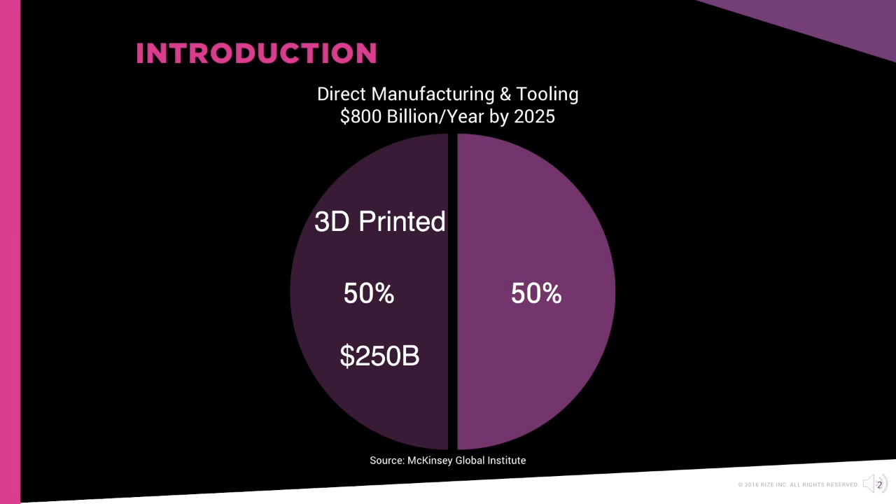McKinsey Global Institute reports that of the $12 trillion manufacturing industry, $800 billion per year by 2025 will be direct manufacturing and tooling. And of that, 50%, or $250 billion to $550 billion per year, will be 3D printed.

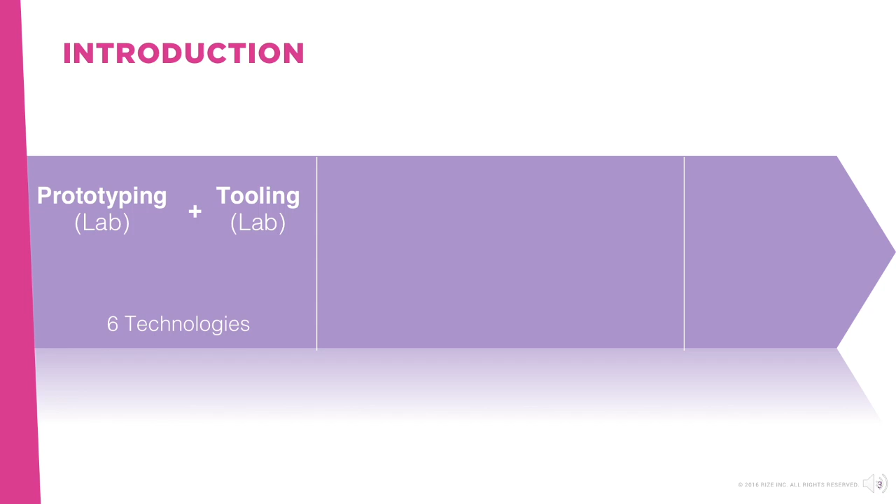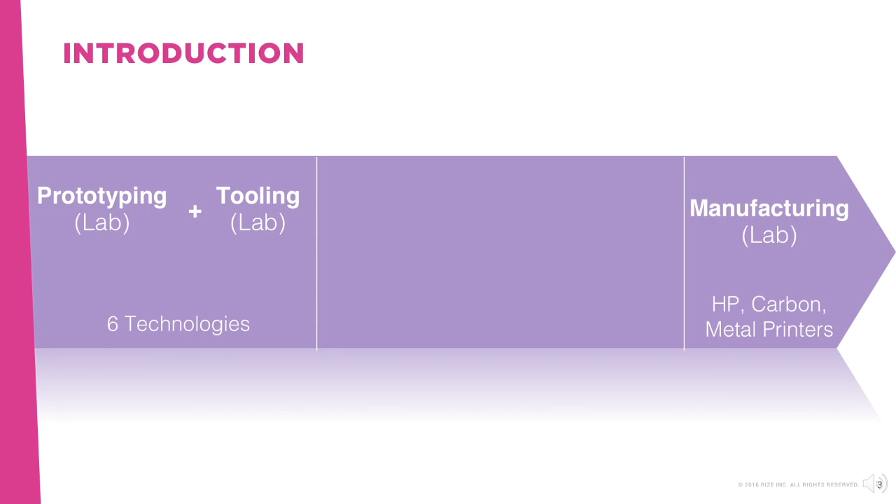Despite this colossal market opportunity, most of today's industrial-class 3D printers are suitable only for prototyping and tooling and must be situated in additive manufacturing labs due to their size, expense, special facility and equipment requirements, and complex pre- and post-processing methods. Currently, only a few systems—Carbon, HP, and some metal 3D printers—are capable of addressing the market for low to mid-volume manufacturing parts. And although these companies are undeniably legitimizing 3D printing for manufacturing, their systems come with significant limitations that restrict large-scale adoption of and applications for 3D printers in direct manufacturing.

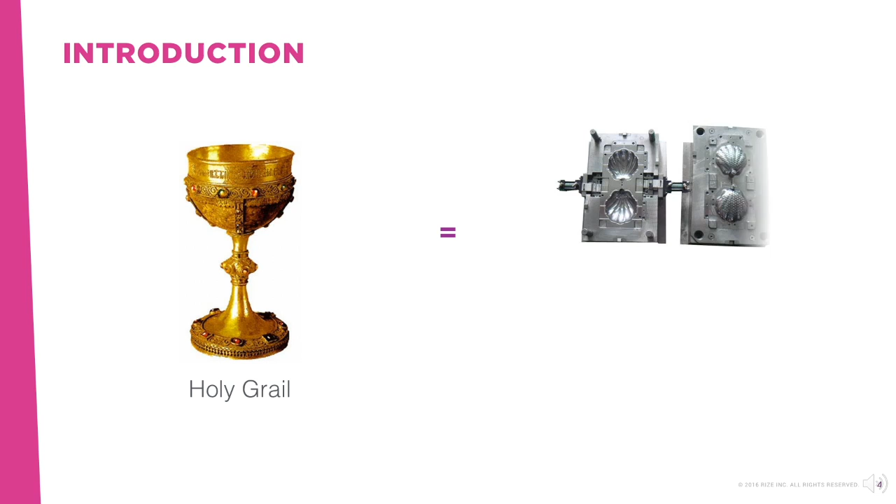In this webcast, we'll discuss how 3D printing has the potential to increase large-scale adoption of the technology for new direct manufacturing applications beyond the additive manufacturing lab, and explore what's needed to get there.

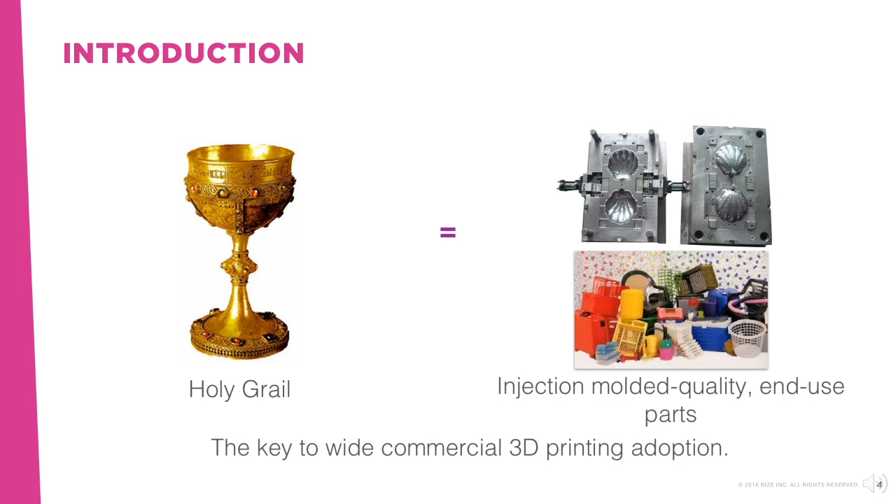The factory of the future: your office.

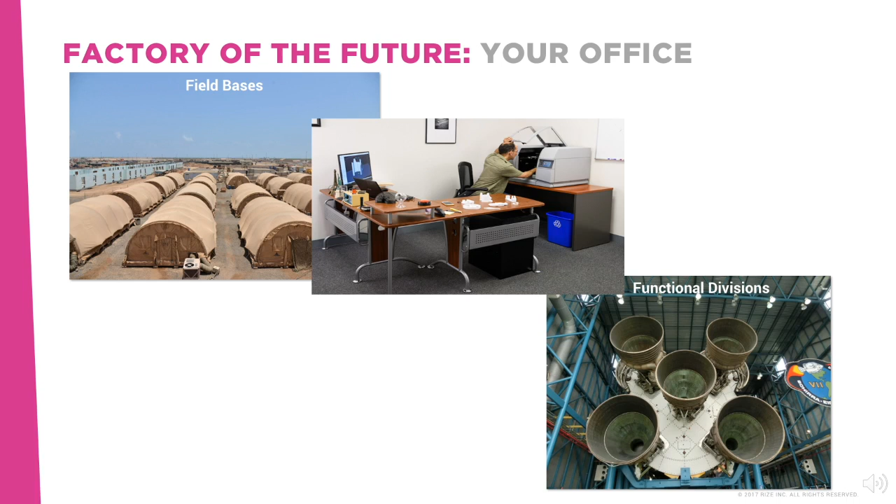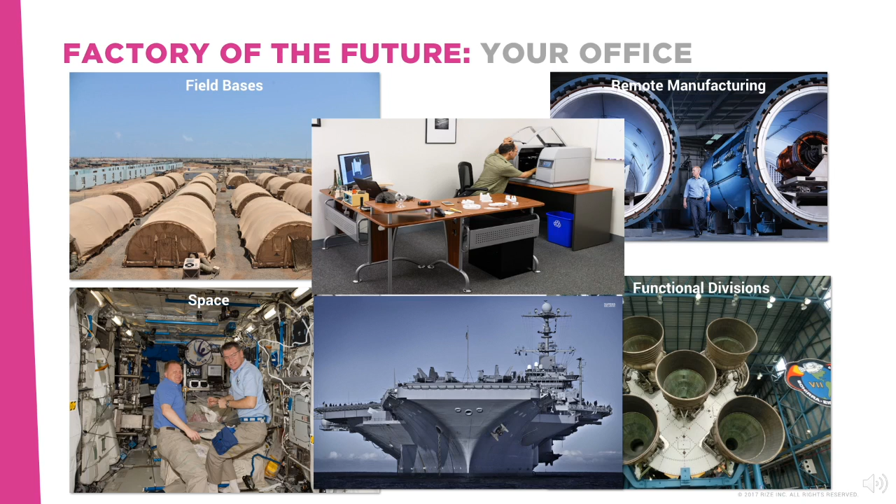In order to significantly expand manufacturing applications and markets for 3D printing, the technology must break the chains of the additive manufacturing lab and move into the production facility of the future, the manufacturing office, wherever that office is located and whatever form it takes.

There's an enormous unaddressed market for producing customized one-offs and low-volume manufactured end-use parts and tooling on demand in both lab and non-lab environments, including the mechanical engineer's office to make real functional parts, on the manufacturing floor next to the assembly line to make custom tools, jigs, and fixtures on the fly, in the factory to make spare part replacements on demand rather than in bulk years earlier and stored.

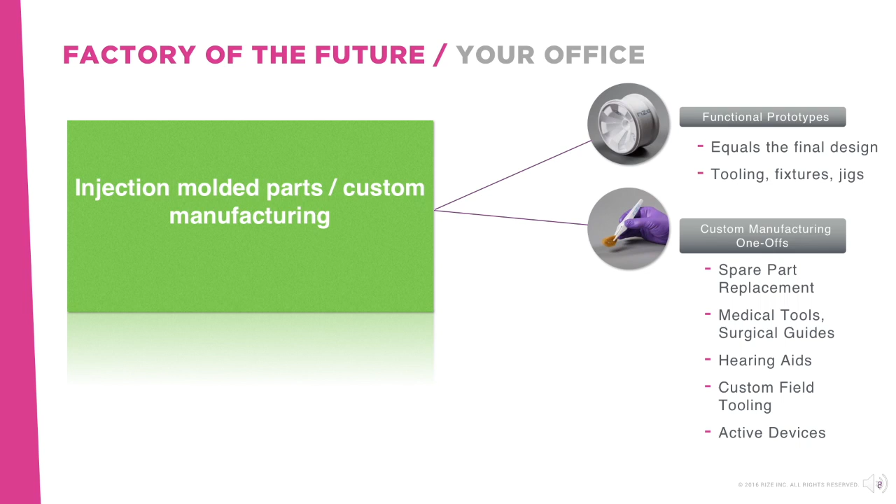In the dental, medical, and audiology office to produce dental devices, surgical guides, and hearing aids uniquely tailored for each patient, the mechanic shop to make replacement parts, on ships, in air, on spacecraft, and in military field locations for field repairs, and more.

The manufacturing office is a new paradigm in manufacturing because existing manufacturing-capable 3D printing systems are unable to address this market. It's simply inefficient and impractical for them to produce one-offs, given their size, price, and complexity, and they certainly aren't systems that can be located in an office or in other remote non-lab locations due to their materials, processes, and post-processing requirements.

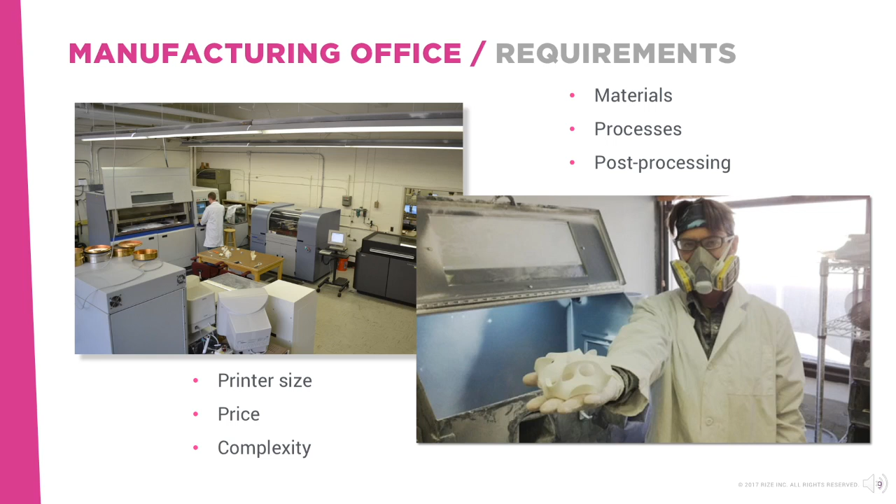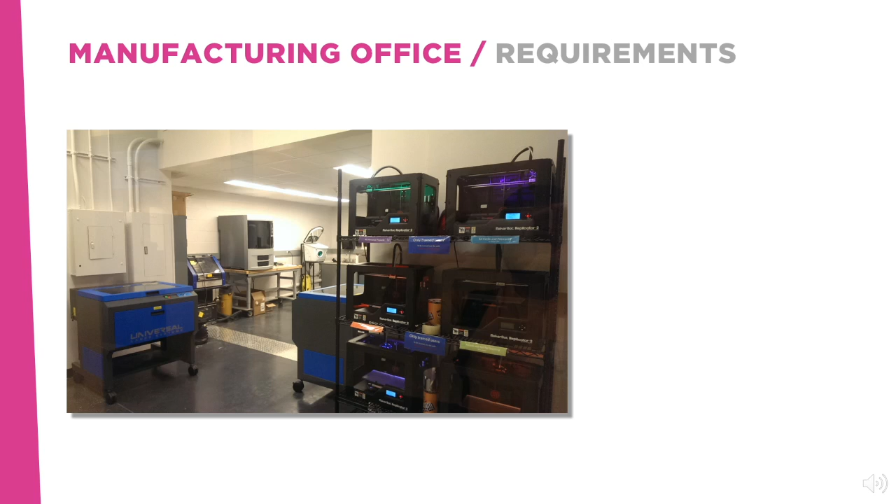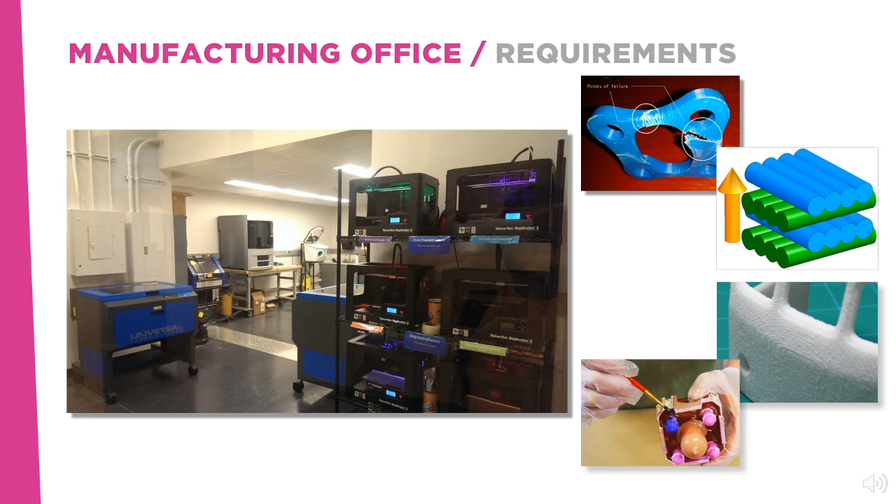Prototyping-capable 3D printers, representing the majority of industrial-class 3D printers today, can't produce parts with the required strength, surface finish, heat deflection temperature, color, and other properties that would be considered acceptable for manufactured end-use parts. Further, these systems involve steps throughout their processes that can't be done in an office and in remote locations outside of a specially equipped additive manufacturing lab.

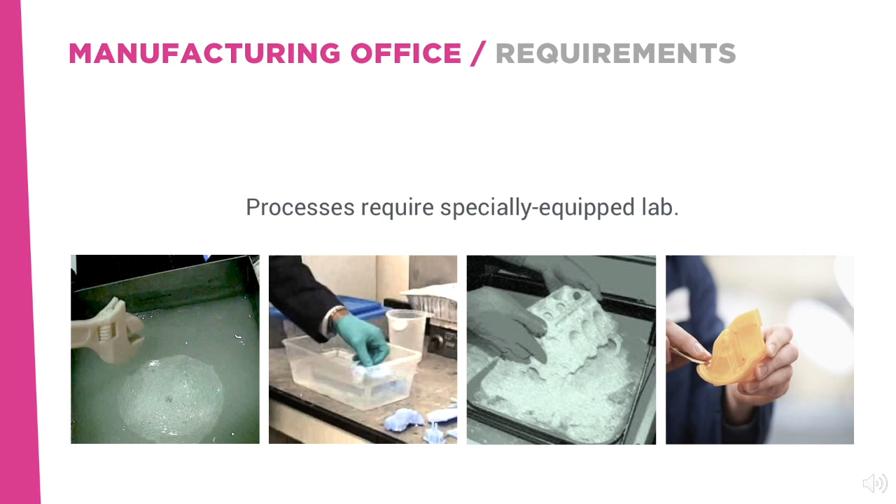With the deafening burst of the consumer and hobbyist 3D printing bubble over the last couple of years, some large companies that previously offered a low-cost line of desktop 3D printers targeting this audience wisely abandoned those lines in favor of expensive industrial-class manufacturing machines suitable for additive manufacturing lab environments.

Yet other companies have taken a different approach. These companies didn't change their machines. For them, the shift has purely been a marketing one, where they're selling their hobby-class desktop 3D printers, previously marketed as consumer 3D printers, as low-cost commercial-grade systems. Still, other companies have made some minor changes to their hobby-class machines or software and labeled them professional or commercial 3D printers, more for marketing and sales impact rather than meaningful enhancements that would benefit the typical industrial user.

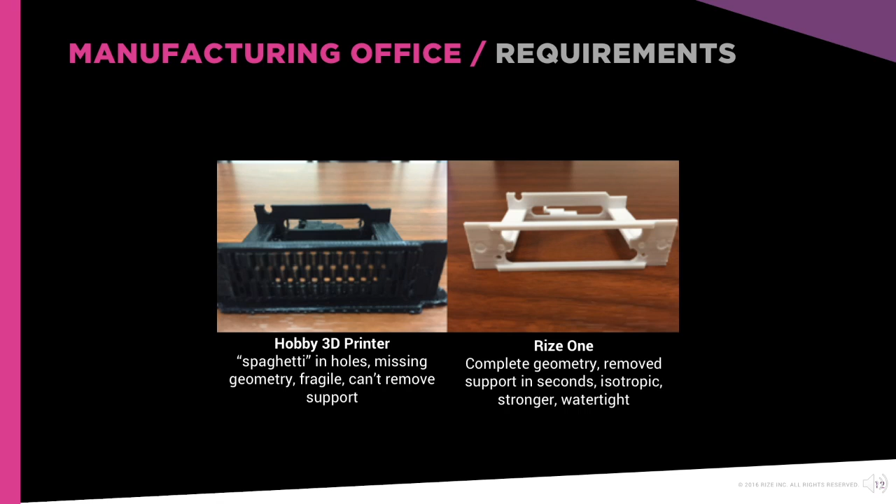However, these machines are not suitable for manufacturing and other industrial use, either in the office or in the lab, due to insufficient part strength and material properties, messy and time-consuming post-processing methods, substandard part quality, printer reliability and durability concerns, inadequate build volume, and harmful particle emissions, among other factors.

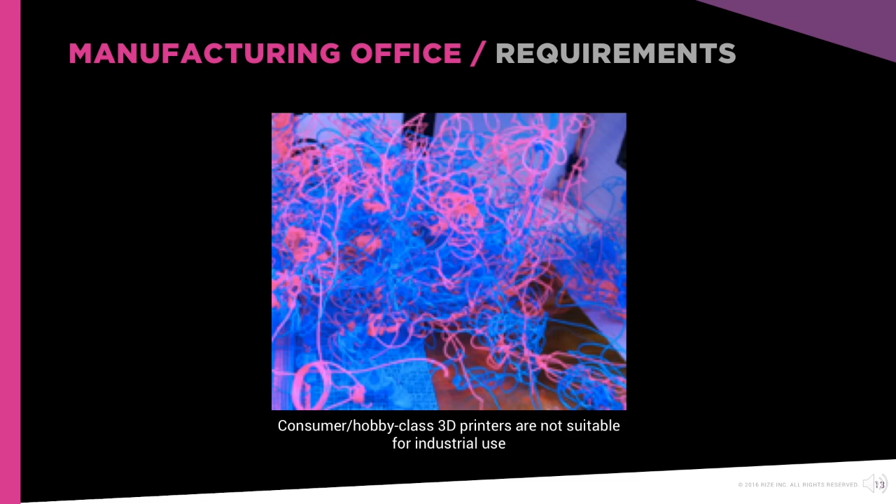Rize's ability to efficiently produce customized one-offs and low volumes of end-use parts anywhere and anytime makes it an ideal complement to manufacturing-capable machines operating in labs building low to mid volumes of end-use parts.

In fact, overburdened additive manufacturing lab managers are not only happy to use Rize 3D printers in their labs, they'd also like to place them in their engineers' offices to reduce their own workload and put parts directly and immediately into the hands of the people who need them.

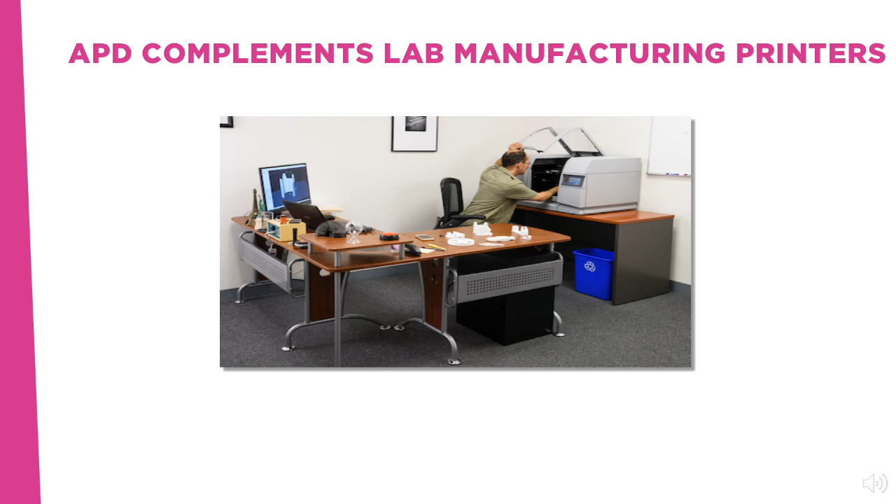According to Gary Rabinovitz, additive manufacturing lab manager at Reebok, a zero post-processing and environmentally friendly 3D printer would enable our designers to 3D print themselves and reduce some of the workload from the lab.

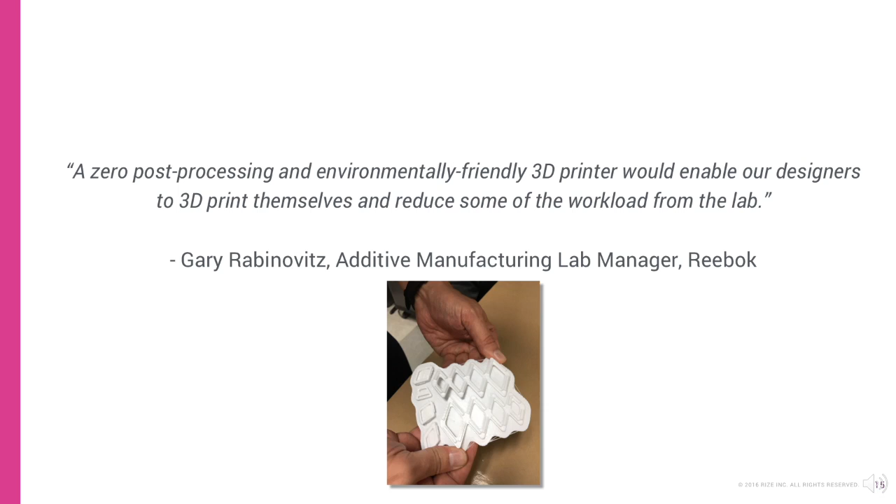Many lab managers already have initiatives underway to place machines in their engineers' offices, but until now, they haven't had a suitable solution. Rize 1, powered by our patented APD process, is the only industrial-class office 3D printer enabling the new manufacturing office.